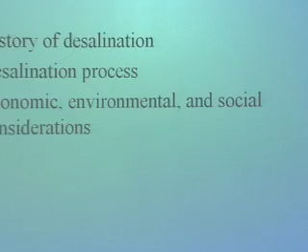So tonight, I want to talk a bit about the history of desalination, then give a brief overview of the desalination process. Then I'd like to discuss some of the advantages and disadvantages of seawater desalination, which I've organized into economic, environmental, and social considerations. And then I want to conclude with a discussion of climate change and seawater desalination, and the three important ways these issues intersect.

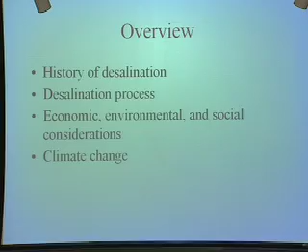In terms of history, the idea of separating salt from water dates back to ancient times, when salt was really the precious commodity. Salt was used both as a currency and to preserve food, and it enabled much of our exploration of lands, particularly by ship. Ironically, it was really the shipping and maritime culture that required desalination for freshwater as well, and many of the early efforts centered around providing water to those on ships.

Curacao in the Netherlands Antilles was really one of the first places to make a major commitment to desalination, and plants have been operating there since about 1928. Even the local beer is made with desalinated seawater. A major plant was built in what is now Saudi Arabia back in 1938. So seawater desalination has a very long history—it's not a brand new technology, it's one we've been doing for quite a while.

Today, as of January 2005, desalination is practiced in about 110 different countries. There are an estimated 2,700 seawater desalination plants worldwide, with an installed capacity of about 6 million acre-feet per year. To put that in perspective, California's urban water use is currently about 9 million acre-feet, so about two-thirds of California's use is generated via desalination every year globally.

I'd like to give a cautionary note on those numbers. The database I pulled them from includes plants that were contracted but never built, or operated and are no longer operating. So that's kind of a best case scenario—my guess is there are significantly fewer plants actually in operation today.

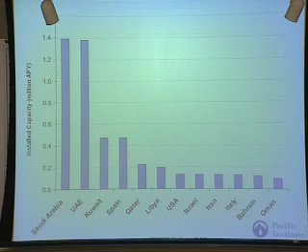So in general, seawater desalination is practiced in oil-rich and/or water-scarce regions. But as David mentioned in the introduction, that may be changing. Seawater desalination has typically been only a minor component of California's water supply portfolio.

The California Coastal Commission, in a report released a few years ago, lists about a dozen mostly small desalination facilities along California's coast, with total capacity of about 7,000 acre-feet per year. For those not familiar with acre-feet, an acre-foot is estimated to provide two households with water for a year. Most of these are small facilities that generally provide high-quality water for industrial purposes or power plant cooling.

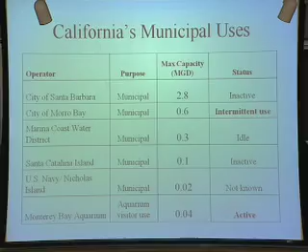However, there are a few used for municipal purposes, shown here on this figure. In most cases, though, they're inactive or only used intermittently. There's really only one actively used desalination facility for municipal purposes, and that's at the Monterey Bay Aquarium.

And they use seawater desalination to produce water for their toilets, essentially. It's a very small use, and that's about the only one in active use.

But I want to draw your attention to the plant in Santa Barbara. It's listed here as having a capacity of about 2.8 million gallons per day. This is the largest plant in California, and it is inactive, as shown here.

As many of you know in this room, California experienced a very major drought that extended from 1987 to 1992. This drought hit Santa Barbara particularly hard because at that time they were very reliant on local precipitation and local groundwater sources. They had implemented quite a bit of conservation and were actually successfully able to reduce their demand by 40%.

But given the length and intensity of the drought, by 1991 many of their reservoirs were drying up. At that time, residents overwhelmingly supported building, and voted for, a seawater desalination plant at a cost of about $34 million. On the same ballot, they also wanted to connect to the State Water Project.

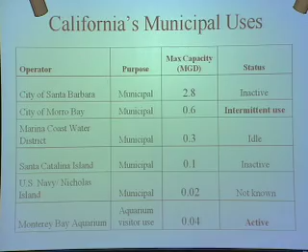So they received the appropriate permits, particularly from the Coastal Commission, which tends to be the hardest permit to get. And the plant was completed in March of 1992.

The plant successfully produced desalinated water, but shortly thereafter the drought ended, and water demand never fully rebounded, in part because many of the water conservation and efficiency improvements they had installed continued to provide savings even after the drought. Some of the low-flow toilets and other fixtures actually reduced demand in the long term.

In addition, the cost of producing the desalinated water was so high that they really couldn't justify producing it during non-drought years. After 5 years, there was an initial contract phase, and after that the partnering agencies all pulled out, and it became the sole property of Santa Barbara.

Eventually the plant was put into long-term standby. Santa Barbara decided to sell off half of the plant to a company in Saudi Arabia, and it is now operating on the other side of the globe. The plant here has been decommissioned, in part because even maintaining a plant in standby entails some capital outlay.

Now the cost to start up the plant and the timing to actually do so are largely unknown. In fact, many of the technologies installed in this plant, built 15 years ago, are no longer state-of-the-art, as you might imagine. So that's California's history of desalination—it hasn't yet been successfully done on a large scale, although that may be changing.

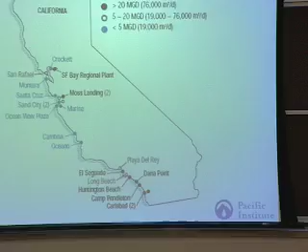This map shows the proposed plants in California as of spring 2006, when we completed this report. As you can see, plants generally extend from here, the Bay Area, south. The points shown in blue tend to be some of the smaller plants, producing less than 5 million gallons per day.

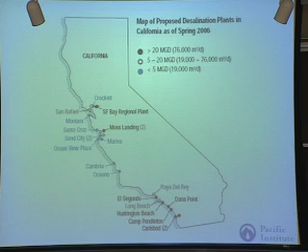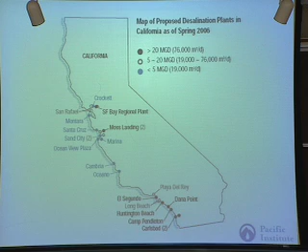The dots shown in black, generally centered around Southern California, tend to be some of the larger plants, producing about 20 to 50 million gallons per day. Since this report was completed, I went back and called many of the people putting forth proposals. Two of the largest plants have been taken offline—those were being pursued by the San Diego County Water Authority.

It's really no surprise that the Carlsbad one was taken offline. Those were dueling proposals, one put forth by Poseidon, one by San Diego County Water Authority, so it's no surprise that eventually one of them would fall off. But the two that were canceled were among some of the larger ones.

Here in the Bay Area, there's talk of installing 4 plants. One, shown there in Crockett, would be at the C&H sugar factory—that one is being built by East Bay MUD.

They've actually already received some grant funding for that project and are moving forward on this. It's a relatively small plant, and the water would be used on site, offsetting potable water that East Bay Mud currently delivers to the C&H sugar factory.

Also, Montara, out there on the coast, is also thinking of building a plant. This also would be very small. They're still in the very initial phases, doing feasibility studies, so it's not quite clear that that's going to happen anytime soon.

San Rafael, however, recently completed their environmental impact report. They just closed public comment on March 28th, so two weeks or so, and are deciding whether or not to move forward on that.

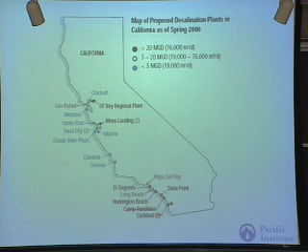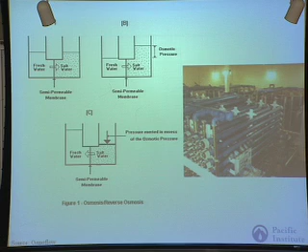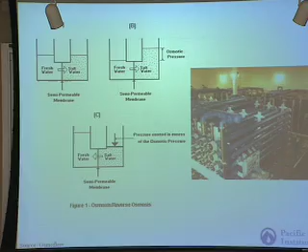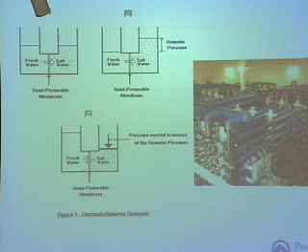So in this next slide, I want to talk about the process of desalinating water. Desalination occurs naturally all around us every day. The Earth's hydrologic cycle naturally desalinates water using solar energy, which drives evaporation from the ocean. That water turns into water vapor and rains down as fresh water. In fact, many of the earliest desalination plants were based on this process: thermal desalination, in which they would heat seawater, collect the water vapor, recondense it, and produce fresh water. Today, reverse osmosis is really the choice being pursued by most of the larger plants.

Before I talk about reverse osmosis, let me talk about natural osmosis. If you have two liquids with differing salt concentrations separated by a membrane, generally water will flow from the less concentrated solution through the membrane to the more concentrated solution, until the concentration on both sides is equal. Reverse osmosis uses pressure to force the saline water through the membrane, leaving salts on one side and pushing through fresh water on the other side.

Here I show, let me get my clicker, here is what the reverse osmosis membranes tend to look like. They're generally encased in these plastic sheaths and put in a row. The water is forced through, and then the fresh water is collected on one side, and the saline is diverted toward another.

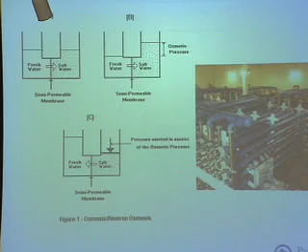Generally, pretreatment consists of adding chemicals to encourage precipitation of contaminants or solutes, and then that solution is filtered. After it's filtered, it makes its way to the reverse osmosis membranes, where a high pressure pump pushes the water through.

The saline wastewater is diverted and generally disposed of into the ocean, and the fresh water moves on through to post-treatment. If we're thinking about a 50 million gallon per day plant, that refers to the amount of water produced. To produce that, the plant takes in about 100 million gallons per day, so about 50% of the water makes its way through to post-treatment. The other 50% is disposed of in the ocean.

The water disposed of in the ocean is generally twice as saline because all of the salt from the fresh water has been put into that water. It also contains some of the chemicals used in the pretreatment system, which I'll get back to in a little bit. So after going through the reverse osmosis process, the water must then undergo post-treatment.

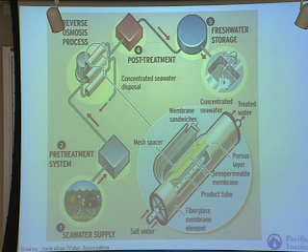For the remainder of my talk, I want to focus more on the advantages and disadvantages of desalination. I've organized them into three different areas. The first, and the question I get asked most often, is how much does it cost?

The cost is often reported in ways that are not very comparable. Some report the cost to produce water, while others will report the cost to actually deliver water to the customers. Some will report the predicted cost, whereas others will report the actual cost, and oftentimes those can be very different.

There are also subsidies, both visible and hidden, that affect the cost. For example, the Metropolitan Water District down in Southern California is providing a subsidy in the amount of $250 per acre foot of water produced, yet oftentimes the cost is reported both with and without the subsidy, and it's often not clear which is which. So I would caution against simply looking at the cost.

In addition, to make matters even more complicated, the costs are very site-specific, and simple cost comparisons can be misleading. The size of the plant affects the cost. Generally, larger plants can produce water at a lower cost.

The temperature and the salinity also affect the cost. Colder, more saline water is more difficult to desalinate, and therefore the costs of that water tend to be higher. For example, in the Middle East and along the Mediterranean, much of that water is saltier than water here in the Pacific Ocean. So doing a simple comparison between the cost in California and the cost in the Middle East is not a very fair comparison.

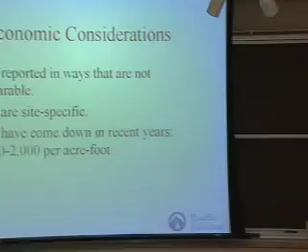Some of the smaller plants that are being proposed, for example the San Rafael plant in Marin, tend to be even higher than this because it would be a smaller plant.

Optimists predict continued cost reductions, with a long-term goal of reducing the cost by 50% by the year 2020. I would caution against excessive optimism on that, in part because the past is not necessarily a good predictor of the future, and some of the easier achievements in membrane performance accomplished over the past 10 to 15 years may not continue.

In addition, many of the newer estimates coming in about the cost are actually slightly higher than they were a few years ago, and that's due to rising capital costs and rising energy costs. As you know, oil costs are creeping over $100 a barrel, and as prices go up, the cost of desalination goes up.

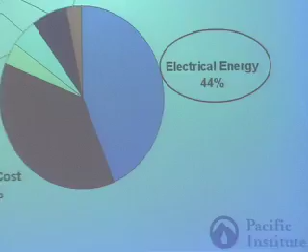So that brings me to the next topic, and that is energy. Energy is a significant, if not the major component of the cost of desalination. There has been significant research focused on reducing energy use, particularly through energy recovery devices, but it's still the largest single variable cost. And in the past couple of years, there's been increasing attention on the connections between water and energy, particularly in California, where we move and transport water significant distances.

The California Energy Commission, a few years ago, in 2005, came out with a report on the connections between water and energy in California. And they found that about 20% of California's electricity use and a third of our natural gas use, that's non-electricity, natural gas use, is water related. Now, much of that is end use, so that's the energy we use to heat water for showers, clothes washers, those kinds of things. But water sources in California have different energy uses.

Water is heavy, weighing about 8 pounds per gallon, and as we're moving it large distances, that has some serious energy implications. And when we're looking into the future, thinking about implementing Assembly Bill 32, which was the executive order put forth by Schwarzenegger to reduce and cap our greenhouse gas emissions, we really need to start paying attention to this link between energy and water.

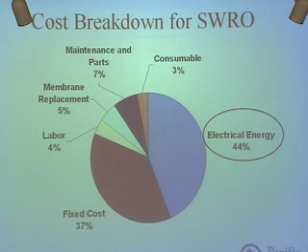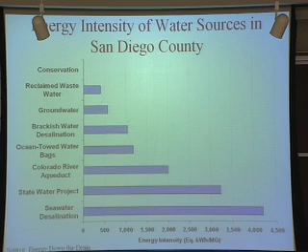Here I show the energy intensity of water sources in San Diego County. Now, San Diego County relies on local groundwater, but they also import a significant amount of their water through the Colorado River Aqueduct here and the State Water Project. So this graph shows the energy intensity of the various water sources in San Diego County in equivalent kilowatt hours per million gallons. As you can see here, there's a significant amount of variation.

You'll notice here I've thrown in ocean towed water bags. That's not currently used in San Diego, but I just put it up there to give you an idea of what that might look like on an energy basis. It's not something I think is necessarily politically feasible, but it does add another interesting layer to this. As you can see here, seawater desalination.

Oh, let me briefly mention, the reason we chose San Diego County for this is because that is the furthest distance that water is actually transported in California. The State Water Project takes water out of the Delta, sends it down through the San Joaquin Valley, up and over the Tehachapis, which is the single largest lift in the world, and therefore, as you might imagine, very energy intensive. Some of that energy is recaptured as the water tumbles down the other side of the Tehachapis, but then that water, again, travels all the way down to San Diego.

Same with the Colorado River Aqueduct. That's generally the furthest point. And so we use this because the difference between seawater desalination and some of these others would be at a minimum. In other parts of the coast, particularly those that are relying on local water sources, the difference between their water supply and desalination would be much greater.

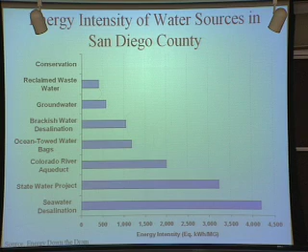As you can see in this figure, desalination is the most energy intensive source available. It's roughly about 4,200 kilowatt hours per million gallons. And because of this energy intensity, relying on it really increases the water supplier's exposure to energy price increases over time and also to annual variation in energy price. And I think this next slide will really drive that point home and will help me elaborate on that a little bit.

So this figure shows the relative cost of potable water. This is in Southern California, and I show 3 different water sources. Desalinated water is up there on the top, a recycled water, and then a gravity surface water. And for all of these, I say relative cost because I've normalized the cost based on their 1971 values. That is not to say that the costs were equal in that year, but it does enable us to look at changes over time on a relative basis. Here we've looked at how the price of these different water sources would vary using actual energy use estimates between 1971 and 2005.

And as shown, for all of the water sources, there tends to be an upward trend in price. Energy prices have gone up during that time, and as a result, the cost of these water supplies has gone up. Now again, this is holding all other things equal. We didn't look at changes or reductions in membrane costs or anything like that. This specifically looks at how energy price trends would affect the cost of these water sources. So again, all of these show an increase because energy prices have gone up.

But the increase for desalinated seawater is much greater than the increase seen in the other water sources because it is such an energy-intensive source. So between 1971 and 2005, desalinated seawater went up by a factor of 2.5, whereas recycled water went up by a factor of only 2. What this graph also shows is that there's annual variation and that these are amplified for your more energy-intensive source.

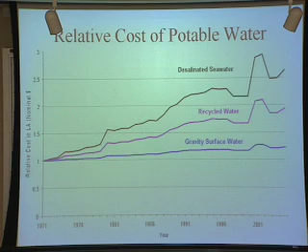So in this next slide, I want to discuss another issue that affects the cost, but is often not framed in that manner, and that's reliability and water supply diversity. So seawater desalination provides a very high-quality source of water that is largely independent of weather conditions. So that can obviously be important during a drought or as an adaptation to climate change. You simply turn the plant on or off when you need it or don't need it. Other water sources, let's say a reservoir or a groundwater system, are much more sensitive to your weather patterns. Desalination is not.

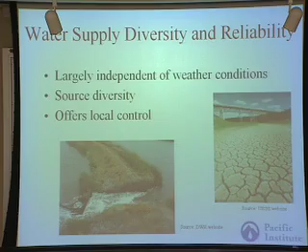Desalination can also increase your supply diversity, and as you know from doing your finances, that can be a very good thing. You don't want to be too reliant on one source, because if there are changes in that, it doesn't give you a lot of options. It also provides a source that is under direct local control, which can be a very big issue for, say, Southern California, which is importing a lot of their water. For them, it would be a great benefit to have something under their control that they can use when and if they need it.

But how do we compare water sources that have very different reliability levels? That adds an extra dimension to this problem. If you're simply taking the cost at face value, that can lead to very apples to oranges comparisons. We put forth in the report a way of assessing water sources of different reliability levels based on a financial portfolio theory. And in the next two slides, I'm going to try to give you a qualitative description of what that might look like.

For those who have a tendency to enjoy math, not one of them myself, I would point you to our online appendices, which go into great detail about some of the theory behind it.

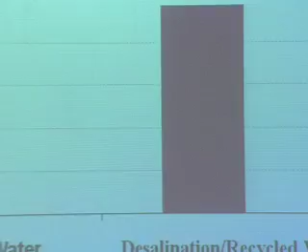So in this next slide, I look at two water sources, a new surface water and a desalination/recycled water. So let's say that a community is growing, and they know that they need to acquire about 2,000 acre-feet of water during a drought year. They're looking again at two sources, a surface water source and a desalination or recycled water, any source that you can just turn on or turn off when you need it.

Now, for this purpose, let's say that the cost of these two options is equal, but they have very different reliability levels. So in the one case, let's look at the surface water system. We know that they need to ensure that there's 2,000 acre-feet in a dry year, and in order to ensure that, they must size their facility much larger to ensure that during that dry year, when their supply is variable, they have enough.

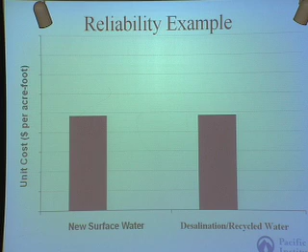Because they're sizing their facility larger, it means that each unit of water during the drought will actually cost more than the amount shown here. For here, let's assume it's $600 per acre-foot. Just throwing that number out there, not a very accurate number. But if we look at it on a constant reliability level, that cost may actually be higher. Because desalination is really independent of weather conditions, the cost on a constant reliability basis is the same. It's still $600 per acre-foot.

So for the surface water, if we adjust the cost based on this constant reliability, it may actually be higher than the desalination. So while at first glance a water supply planner may think options are very similar in cost, they may in fact be quite different. The same kind of calculation can also be performed with water of very different quality. We also do some examples in the report to give you a little more idea. And it also points to the need for adjusting the water cost accordingly, and failing to do so may make a water planner think that two things are the same when in fact they're very different.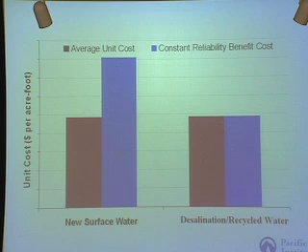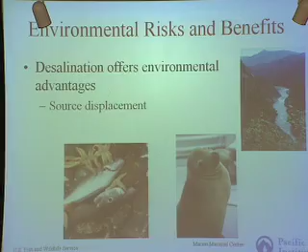I next want to talk a bit about the environmental issues associated with desalination. Seawater desalination can provide some environmental benefits, specifically on source displacement. So it may allow us to actually reduce the quantity of water we're taking from our overtaxed rivers and streams, leaving that water in the system and instead taking water from the ocean. It's important to note, however, that there's really no formal mechanism to ensure that that is actually what's going to happen. Project proponents can make promises about, we're going to return X number of acre-feet back to the environment. This has an environmental benefit. But in many ways, there's no real legal mechanism to ensure that that's going to happen.

There is one exception among the plants being proposed in California, and that's a plant at Moss Landing in the Monterey Bay region. To give you a little bit of history, back in 1995, the State Water Resources Control Board ruled that the water company there, California American Water Company, was taking water above its water rights from the Carmel River, and they ordered them to stop doing so. It's referred to as Order 95-10. And as part of that order, they said that any new supply that you produce must offset your withdrawals from the Carmel River on a one-to-one basis. So in that particular case, any desalination or any other source that they produce will reduce pumping from the Carmel River and provide some environmental benefit.

I think it's important to note, it's been 13 years. There's been very little movement on that, and actually the State Water Resources Control Board a week and a half ago issued a cease and desist order to California American Water Company because of the continued overpumping of the Carmel River. So that's an interesting issue to follow in the next year or so as they consider and move forward in building a desal plant.

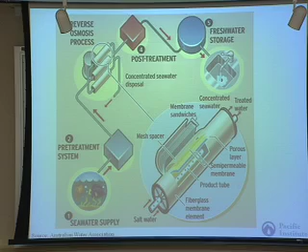In addition to the environmental advantages, however, desalination also poses some environmental risks. So I'm going to take you back to the slide I originally showed. As I mentioned, water is taken into the desal plant often directly from the ocean, and brine is discharged often directly into the ocean. And that brine contains chemicals used throughout the desalination process, as well as a significant amount of salt. So the two environmental impacts are associated with those processes.

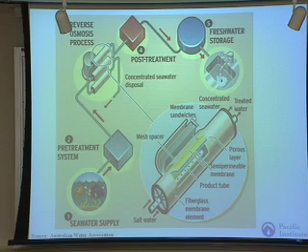Here, generally they have pumps that are pulling in large amounts of water. Medium to large fish can actually be trapped and killed on the intakes. And some of the smaller eggs, larvae, and small fish may actually be sucked into the plant, a process referred to as entrainment, and killed during the pretreatment process. And much of that, those organisms, are then discharged along with this brine. So the brine contains not only high salt concentrations and chemicals, but also some of the marine organisms that are entrained into the plant.

Because it's generally denser than the receiving waters, the brine tends to sink and move along the bottom of the receiving water body, where it's a little bit less well mixed, so it can pose a risk to some of the benthic organisms, particularly the sessile ones that can't really get out of the way.

They also find that some habitats are much more sensitive. Reefs and rocky shore areas tend to be more sensitive than some other areas. And if you're in an enclosed bay, the salt and chemical concentration can accumulate much more so than on a high energy wave coastline.

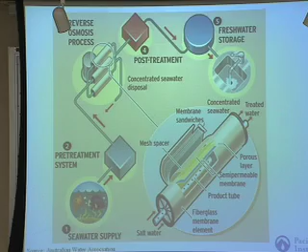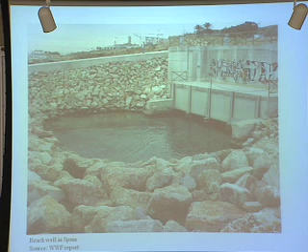One way to mitigate some of these impacts is through beach wells. Here I show a beach well in Spain. With beach wells, the water is pumped from a well drilled beneath the beach, and the sand acts as a natural filter, eliminating some or all of the impingement and entrainment impacts. It also results in water that is much more consistent and can greatly reduce some of your pretreatment costs. So it actually has a win-win associated with it.

This technology is being considered for some of the smaller plants, but because the wells have a limited amount of water they can take in through the sand, it's generally limited to about 1.5 million gallons per day. So if we're thinking about larger 50 million gallon per day plants, we'd be talking about 20, 30, 40 wells along the beach, which may themselves have environmental impacts associated with drilling and disturbing the sand. But this technology is being looked at for some of the smaller plants, and my guess is it'll be where agencies turn to in order to mitigate their impacts.

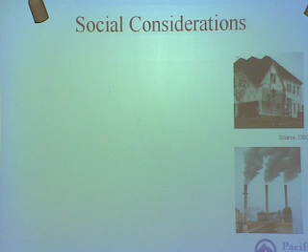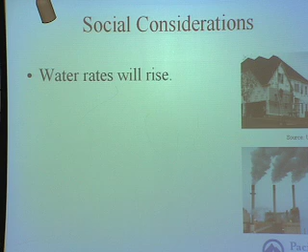So I want to briefly mention some of the social impacts or social considerations. As I mentioned, desalination is much more expensive than many local water sources, so water rates will rise. This obviously has a disproportionate impact on low-income communities and also the elderly who may be on a fixed income.

In addition to disproportionate impacts via water rates, many low-income communities generally tend to live around some of the industrial areas, and therefore may have to suffer some of the impacts associated with increasing energy use or even the brine discharge. Many communities are relying on fishing to provide their primary protein source, and discharging the brine into the waterways may affect them.

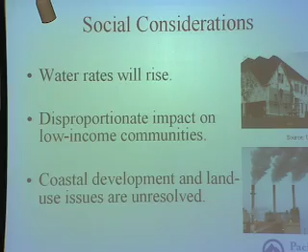In addition, many of these plants are being proposed in areas that are constrained by water. Some of these areas actually have outright growth moratoriums based on the amount of water available. And so by providing another source of water, you're likely going to increase coastal development. While this can generally be either a good or a bad thing, it is an issue local communities really need to be aware of and plan for.

If it's not a desirable outcome, then setting very strict boundaries on where they will deliver water and where they won't can help alleviate that problem. But it is something communities really need to be thinking about.

Finally, I want to talk a bit about climate change and the interactions with seawater desalination. Seawater desalination and climate change interact in three important ways. The first is that desalination plants are coastal infrastructure, and therefore vulnerable to not only rising sea levels, but increases in storm intensity and frequency. So it's critical that proposed plants take this into consideration when designing their outfall location, their intakes, and also simply the location of the plant.

In the projects I've looked at in the environmental impact report, it's not quite clear that they're yet doing that. But given that these systems will exist for at a minimum 30 years, we will see impacts associated with climate change much more than we currently do today by then.

In addition, however, seawater desalination can be considered an adaptation to climate change. As I mentioned, it's largely independent of weather conditions—we can turn it off or on when we need it. So as we look at a climate and precipitation levels that are much more variable, this may enable us to cope with these impacts.

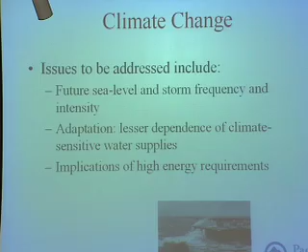A desalination plant in Perth is actually taking a slightly different approach. This plant was completed in November 2006. It's a fairly large plant, producing about 37 million gallons per day. Their energy requirements are relatively high, at about 6,000 kilowatt hours per acre foot, compared to about 4,000 kilowatt hours per acre foot that I showed in some earlier slides.

But they will power it entirely by a nearby wind farm. This is actually the first and largest of the desal plants to be powered by alternative energy sources. In London, officials are considering building a plant powered by biodiesel. So there's a fair amount of work going on in this area. In most cases, it's not yet cost effective to be entirely solar or entirely wind, but as we look at curbing our greenhouse gas emissions, those options may become increasingly favorable over time.

So in conclusion, I believe desalination will likely play an important role in California's water supply portfolio. It's not really a matter of if, it's a matter of when. And when we do choose to do it, it's a matter of how we do it. I believe it's not a technical issue—the issues we need to address are associated with cost, energy use, and environmental impacts.

I think it's also important that we consider alternatives that may provide the same benefits as desalination at lower cost—economic, environmental, and social. Some of these alternatives might include water conservation and efficiency, wastewater recycling, better use of our groundwater, conjunctive use, and better management of our stormwater. We have many options available, and it's important that if we're going to move forward on desalination, given its high cost, energy requirements, and environmental impacts, we implement some of these lower cost alternatives first.